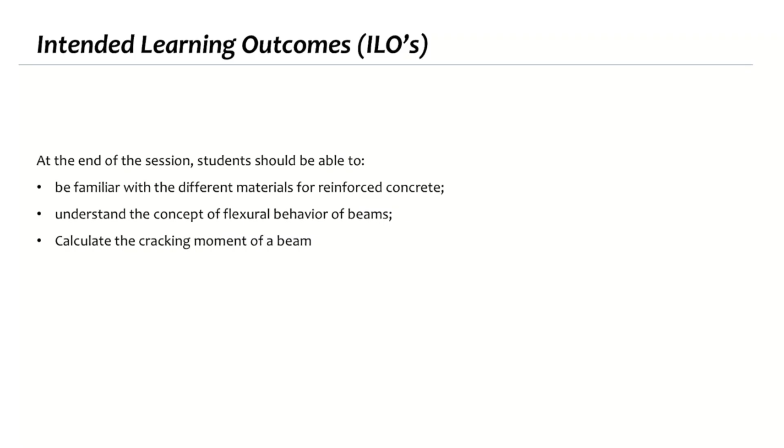So this will be our intended learning outcomes for today.

So first of all, let's talk about the advantage of reinforced concrete. As I've said, basically the most common material in construction is reinforced concrete. We always use reinforced concrete because of the numerous advantages it presents. Marami pong advantages ang reinforced concrete. One of the advantages is it has high compressive strength per unit cost. So ano po yung high compressive strength per unit cost? Concrete is very good in compression, no? Alam po natin 'yan.

Concrete is very good in compression, and since it has a very high compressive capacity, at the same time it is very economical.

Mura po, ano? In comparison with steel, structural steel, for example I-beam, structural hollow section - if you're done with steel, naintindihan niyo po yung I-beam, no? Basically meron po tayong I-beam sa steel. These materials are also very good in compressive strength. However, they have high cost. Mas mahal po yung bakal kaysa sa concrete. So basically, concrete has high compressive strength with economical cost, no?

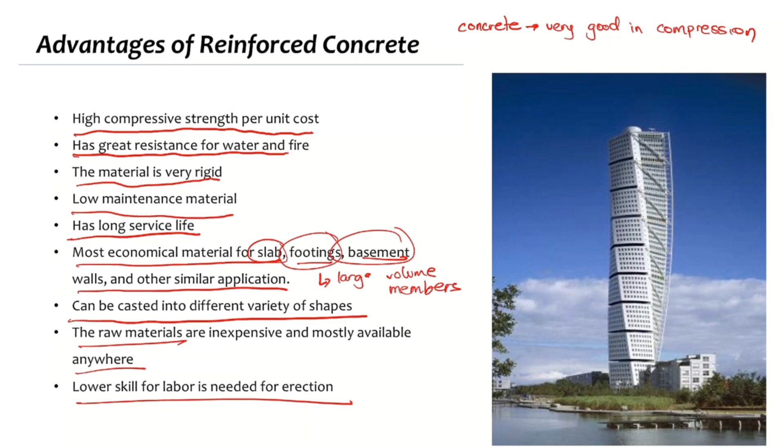Lastly, lower skill for labor is needed for erection. This is true because the most common job for a construction worker is basically pouring of concrete, so you don't need skilled labor to do concrete casting. However, for some other cases, for example steel structures, sometimes you do need skilled labor, especially for connection purposes, when you need to erect special connections. So those are the advantages of reinforced concrete.

So basically, as I've said, reinforced concrete is composed of concrete and steel. Let's talk about concrete first. Concrete is the combination of sand, gravel, crushed rock, or other aggregates held together in a rock-like mass with a paste of cement and water. Basically, what holds the concrete together is the cement - that's like the paste that holds our concrete together. This is what we call the binder.

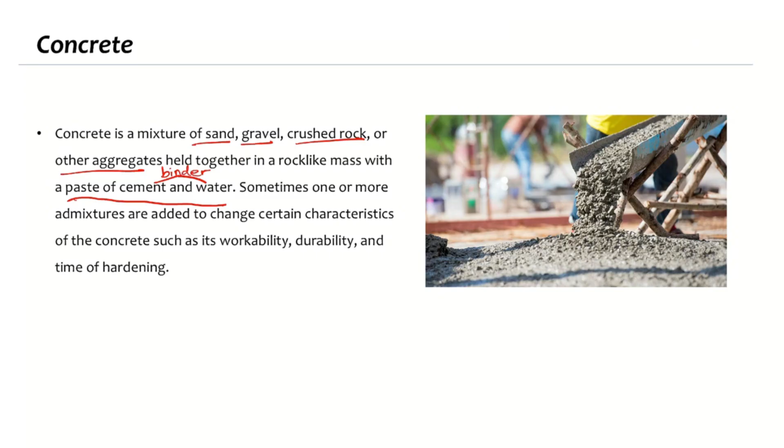Okay, sorry for that, let's continue. So again, talking about concrete - what holds the concrete together is actually the cement plus water. This is actually your binder paste. So basically what forms the concrete: we have cement, and then you add water, plus you add the aggregates, and you will form your concrete. This will form the concrete.

So the aggregates will basically be two types. There are two types of aggregates, which is fine and coarse aggregate. So you have the fine and the coarse aggregate. Basically, what is the fine aggregate that we use in concrete? We have the sand. And for coarse, you have the gravel.

So sometimes one or more admixtures are added for certain characteristics of the concrete, such as workability, durability, and time of hardening. In most projects, especially big projects, adding admixtures is very common, especially if your concrete is coming from a batching plant with a long travel time. Sometimes they add super plasticizer to increase the workability, to increase the strength.

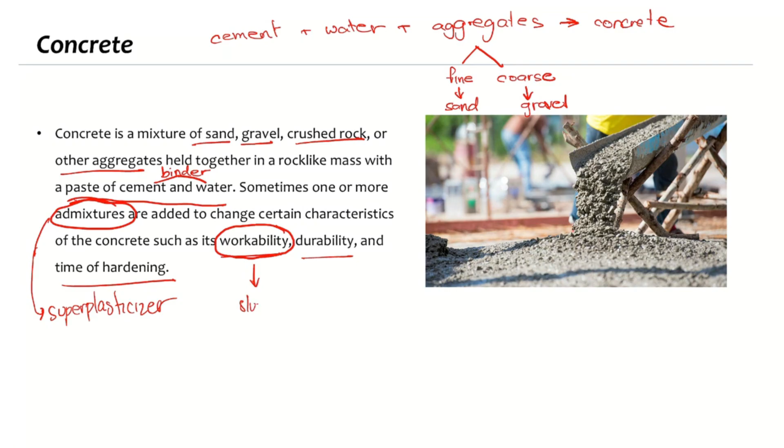So anyway, as I've said, the concrete is actually composed of cement, the aggregates, the water, and the admixture. We need to determine the composition of this concrete - how much cement, how many aggregates, how much water, how much admixture.

So this is where our concrete mix design comes in. The very common concrete mix design that is being used is 1:2:4. What does the first number pertain to? That is cement. The second number is sand, and lastly we have the gravel. So cement, sand, and gravel.

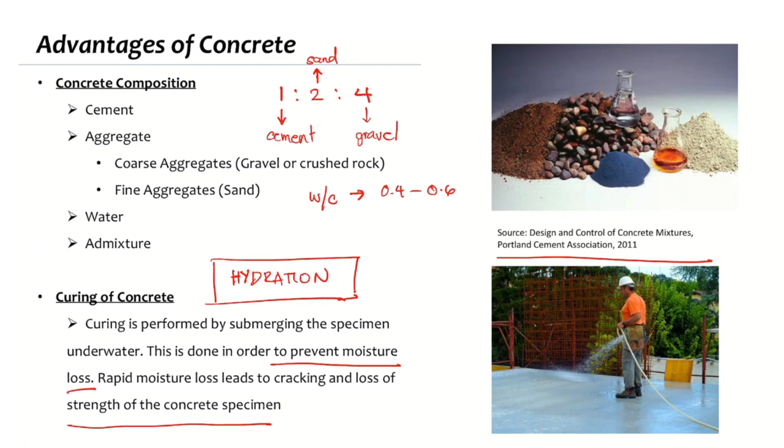So once you cast your concrete, you need to test its strength. The testing of concrete to determine the strength of the casted concrete is in accordance with ASTM C39 - the standard method for compressive strength of cylindrical concrete specimens. You get a sample of the concrete you cast and create a concrete cylinder with a height of 300 mm and a diameter of 150 mm. After curing, you go to the laboratory to test your concrete by putting it in a machine.

What do we call this machine? That machine is used to test concrete, steel, and other specimens. What do we call that machine? Is it familiar?

We have the UTM, that is correct. This is the Universal Testing Machine.

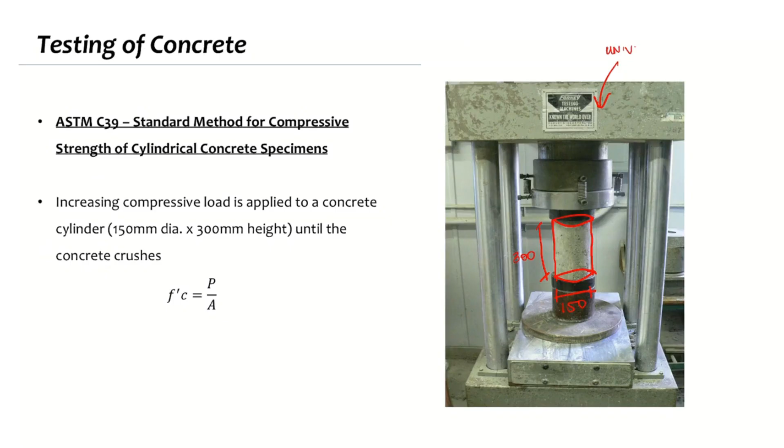This is our UTM. So, once you've created your sample that is 150mm diameter with 300mm height, you go to the laboratory, put it in the universal testing machine, and apply load. The machine will apply an increasing load until the concrete breaks.

So maybe you watched a video during your ConMat class when you took construction materials, showing how to test a concrete cylinder. Basically, when we test a concrete cylinder, once it reaches its maximum strength, it suddenly explodes.

Do you remember that? The concrete suddenly explodes when it reaches its maximum load. When the concrete cracks, it suddenly bursts, like a boom. So why do you think that happens? Why does the concrete suddenly break when it reaches its maximum strength? Why does it suddenly fail?

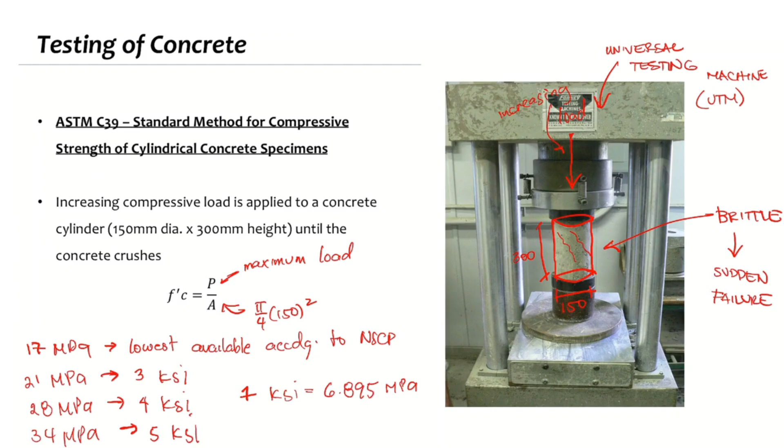Let's recall what we learned in construction materials, or in mechanics of materials. If you plot stress and strain at the beginning of loading, the increase is actually linear - we have a linear increase in stress versus strain. After you reach the proportionality limit, it diverts into a nonlinear curve.

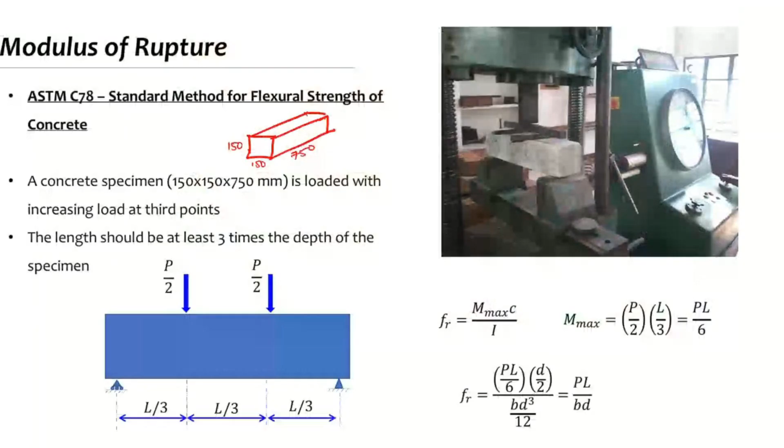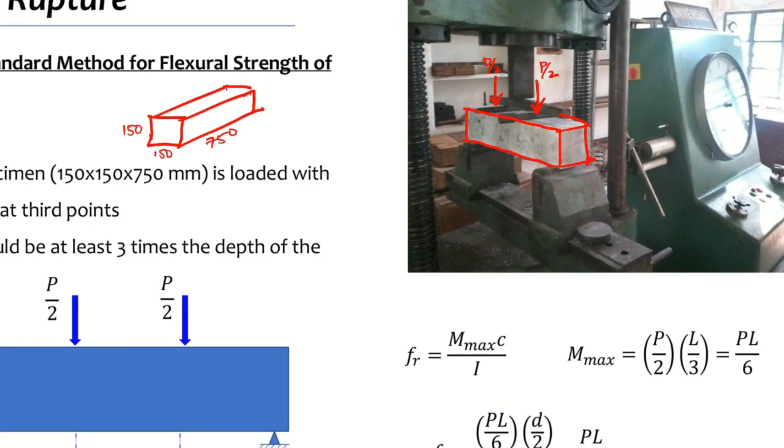This will be your specimen, and then you will have a 2-point loading. Ibig sabihin ng 2-point loading, meron tayong dalawang point kung saan matatransfer yung load. So we have P over 2 and P over 2. And then we will apply the load until the concrete cracks in tension. Mag-a-apply tayo ng load dyan, increase natin yung load until mag-crack si concrete specimen.

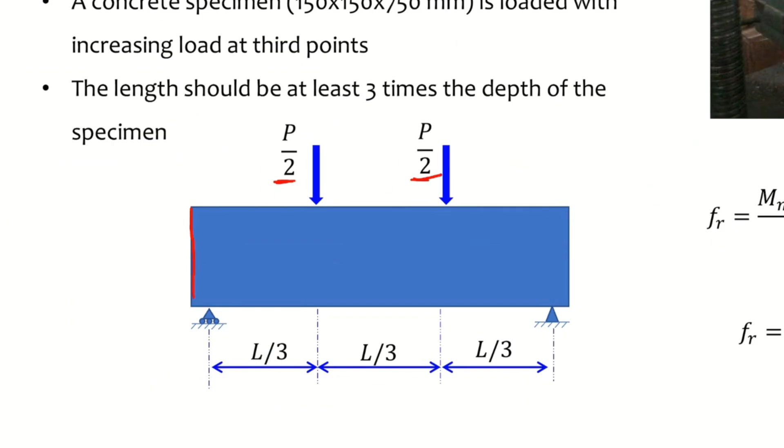So basically, if we're going to idealize, this will be our concrete specimen. We have P over 2 on the left side and P over 2 on the right side, meron kang dalawang P over 2 located at L over 3. So basically, if you want to calculate the shear diagram, you have a reaction dito, P over 2, reaction mo ulit P over 2. So you have P over 2, P over 2, P over 2.

So this will be your shear diagram. This is your shear diagram. That is your shear diagram.

And then if we want to calculate the moment diagram, you just take the area of the shear diagram. Kuhanin lang natin yung area. This is L over 3, this is also L over 3, L over 3. So calculating the area of the shear diagram, you have basically P over 2 multiplied by L over 3. So this is your maximum moment. The maximum moment, according to our shear and moment diagram, the maximum moment is PL over 6.

So in order to calculate the stress, we need to use the simple formula MC over I. Alam natin that if this is simply supported, the top part is actually in compression and the bottom part is actually in tension. Naka-compression yan, ang bottom part is in tension.

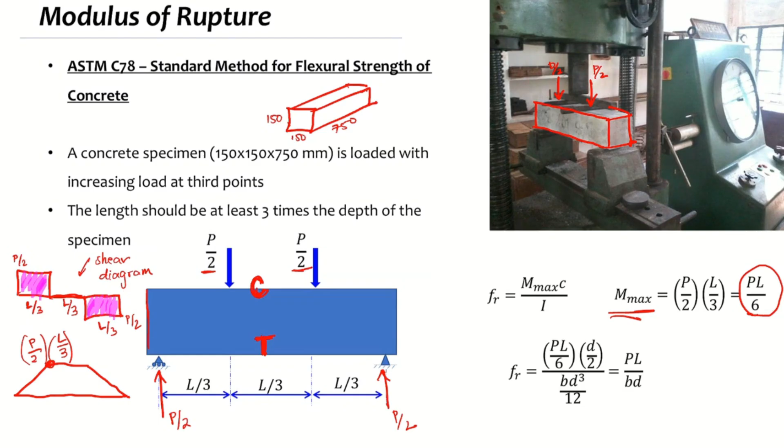So if we want to calculate for the tension stress, kung kailan magka-crack yung concrete, we need to calculate for the tensile stress. Tensile stress is equal to moment MC over I. I don't know if you still remember this simple formula, but basically this is from mechanics of materials. M is the moment, C is the distance from neutral axis to the extreme tension fiber, I is the moment of inertia.

So if you want to calculate for the tension stress, kung kailan magka-crack yung concrete, the moment is PL over 6 as defined, the maximum moment is PL over 6. The distance from the neutral axis to the extreme tension fiber is basically kalahati ng ating kalahati ng depth, so that will be D over 2, divided by the moment of inertia. The moment of inertia is BH cube over 12, for a rectangular beam. So the moment of inertia is BH cube over 12.

So if we are going to simplify the maximum tensile stress based on the result of a standard method for flexural strength of concrete using the value P, recorded is PL over BD. So that is how we determine the maximum tension stress or the modulus of rupture. Yan po yung modulus of rupture natin.

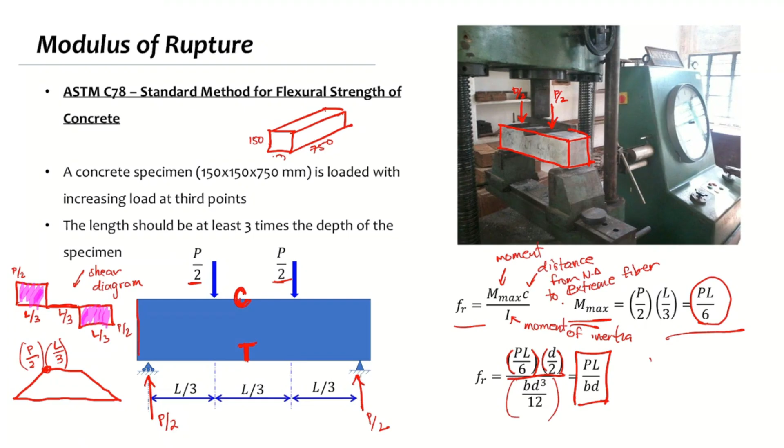Tensile strength kung kailan magka-crack si concrete. So, kailangan nyo bubuin, no? The modulus of rupture is basically the tensile strength where the concrete cracks in tension, the tensile stress when the concrete cracks in tension.

Okay? So, a simple question is why do we need to provide steel in concrete? Bakit ba natin kailangan mag-provide ng steel?

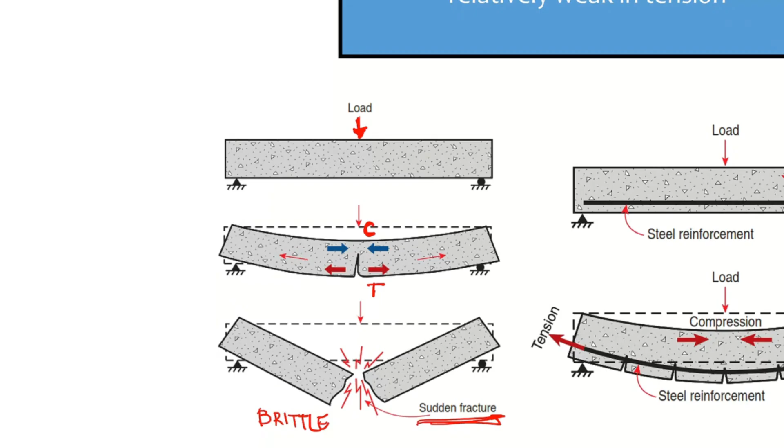However, the solution is to add steel reinforcement. When we add steel, if you add a load at the center, the steel reinforcement can actually resist the tension. So you have compression at the top and tension at the bottom.

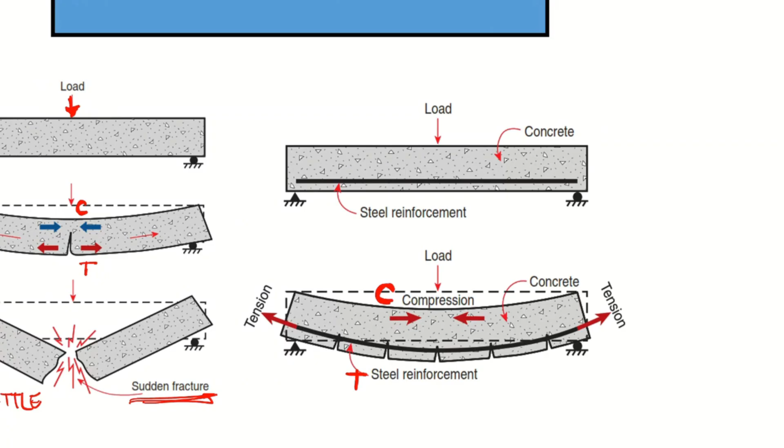However, even though the concrete is weak in tension, the tension will be carried by the steel reinforcement.

And it is an amazing transformation. Why? Because when you add steel reinforcement, the brittle concrete material becomes a ductile material. It is an amazing transformation because the brittle concrete becomes ductile.

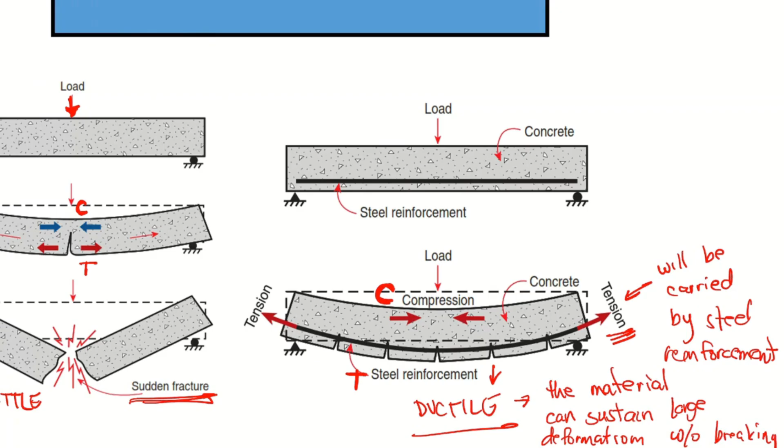What does ductile mean? Ductile is when the material can sustain large deformation without breaking. It means the material can sustain large deformation without breaking, so it is not immediately destroyed when it is ductile. So again, adding the steel reinforcement makes our concrete a ductile material.

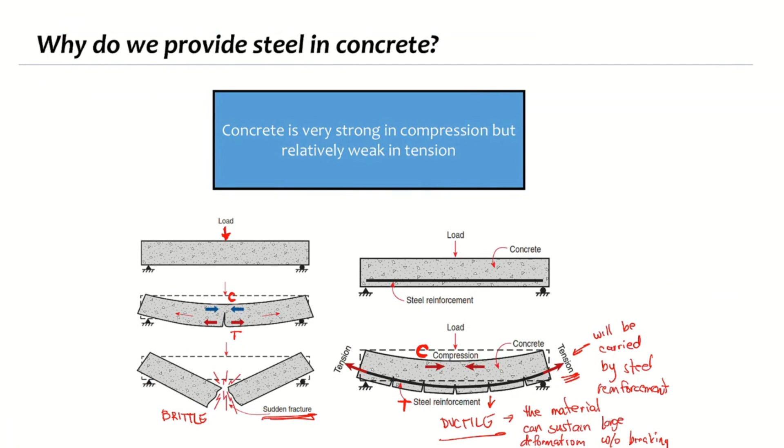So why do we need to use reinforcement in concrete construction? Basically, the first and a very important use of steel reinforcement is to resist the tensile forces, because our concrete is weak in tension. So we need steel to resist tension.

Also, we provide steel reinforcement in order to resist a portion of compression loading. Steel is not only good in tension. The beauty of steel is that it is good in tension as well as compression.

So if you're going to provide reinforcement in columns, let's say for example you have this column, if we provide reinforcement in the column and apply an axial load, the reinforcement also resists the compression loading. So that is the second use of reinforcement, to resist a portion of compression loading.

Next one is to resist diagonal tension and shear. What is diagonal tension? Diagonal tension is actually shear failure.

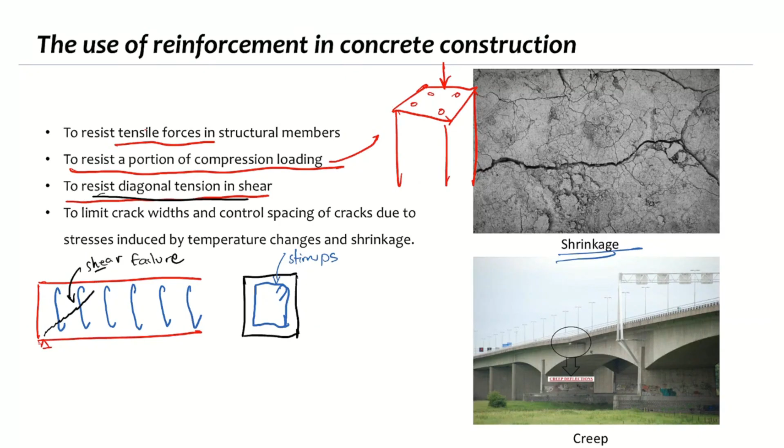Lastly, the last use of reinforcement is to limit crack widths and control spacing of cracks due to stress induced by temperature changes and shrinkage. So we have shrinkage cracking. What does shrinkage cracking mean? Whenever a material, especially concrete material, is exposed to sudden changes in volume, it can actually cause cracking.

Sir, bakit po magkakaroon ng change in volume yung ating concrete? Kapag mainit po, nag-expand yung concrete, lumalaki. So whenever there's heat, kapag sobrang init, there will be expansion, lalaki yung ating concrete. Whenever there's a very low temperature, kapag naman malamig, instead of expand, it will contract. Kapag po malamig, nagko-contract. Kapag mainit, nag-expand. So there's always a changes in temperature.

So okay, side note lang po tayo para ma-appreciate nyo yung changes in temperature. Napapansin nyo po sa mga bridges, may parang awang sa slab. Ano po yung tawag doon? Pag napapansin nyo po, kapag nagda-drive kayo sa bridges, parang may bakal sa gitna, parang may awang sa mga pier. Ang tawag po doon is actually expansion joint. Expansion joint in bridges. Pakita ko lang po para ma-appreciate nyo yung dinidiscuss natin.

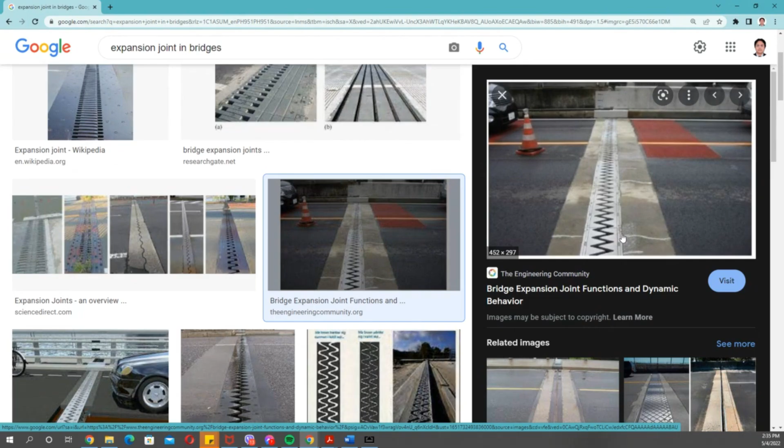So as you can see, in bridges po, nagpo-provide tayo ng parang bakal na ganito po. If you've been to any bridges, meron tayong tinatawag na expansion joint. That expansion joint is actually for temperature changes. Kasi kapag sobrang init, dahil sobrang laki ng concrete volume mo, pwede magbago yung ating concrete, gumagalaw. Kaya po tayo nagpo-provide ng expansion joint. That is for the movement of the deck, movement of the deck of concrete. Kapag sobrang init, lalaki, mag-expand. Kapag sobrang lamig, mag-contract. Okay? That is for the movement.

So basically, sudden changes in volume can actually cause cracking. Kaya po, to limit the crack widths due to cracking, due to any temperature changes, we provide additional reinforcement. Yung additional reinforcement po na yun is just minimum reinforcement. So basically, to avoid cracking, provide minimum reinforcement. And that minimum reinforcement is also called temperature bars. Ito po yung temp bars. Nagpo-provide po tayo ng temp bars para kahit gumalaw yung concrete mo, hindi siya magka-crack. Make sense?

Okay. Another thing, this is also to answer yung one-way slab distribution po natin. Last time we talked about the one-way slab and we mentioned na kapag one-way slab yung slab natin, we only provide reinforcement in one direction. However, as I've said, kahit po one-way slab yan, maglalagay ka pa rin ng reinforcement on the other direction. That is minimum reinforcement for temperature changes. Yun yung tinatawag po natin na temp bars. So again, kapag po one-way slab, even though we only provide the reinforcement in one direction, we provide reinforcement on the other direction for minimum requirements. And that minimum requirement is for temperature bars. That is for the movement. When there is, if that's too hot, gagalaw po siya. It's too cold, gagalaw din naman siya.

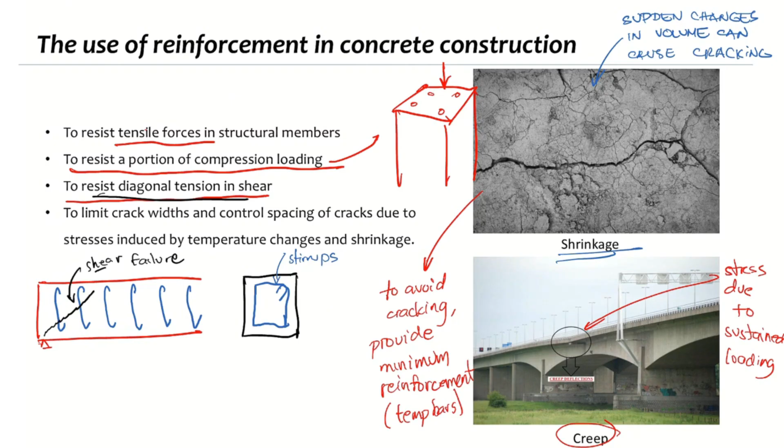So the strength of your longitudinal bars also varies depending on your requirement, depending on usage. For example, if you are going to use it as stirrups, maybe you just need 275 megapascal. It depends on where you will use it.

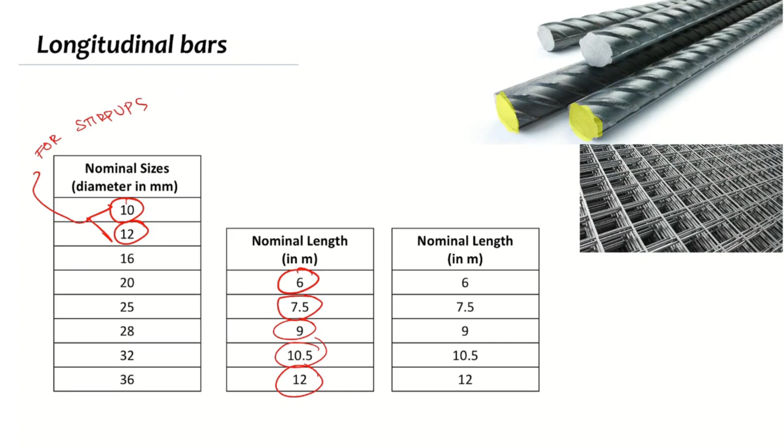The strength, usually in a construction site, when you go there, is actually color-coded. So what they do is they color the bars. The strength is dependent on the color that was used, the color coding.

We have different strengths as per ASTM: 33 KSI, 40 KSI, and 60 KSI. For Philippine National Standard, PNS, we have 230 megapascal, 275 megapascal, and also 415 megapascal. And for NSCP, we have 230 megapascal, 280 megapascal, and 420 megapascal.

For the color coding: for 230 megapascal we use white, for 280 megapascal we use yellow, and lastly for 420 we have green. So white, yellow, and green. Again, when you go to a construction site, the strength is color-coded.

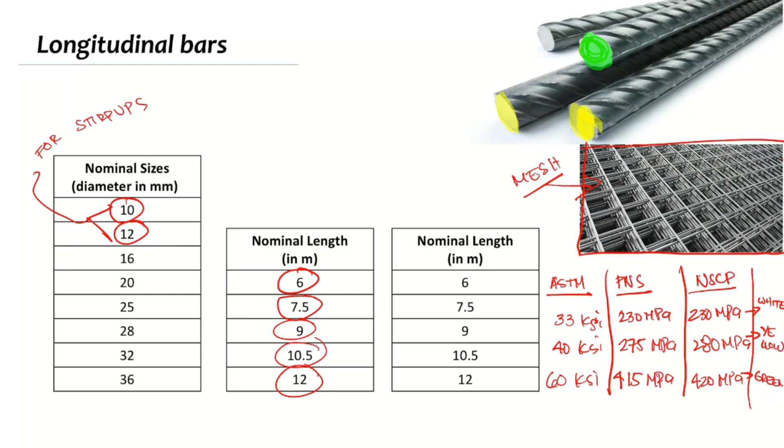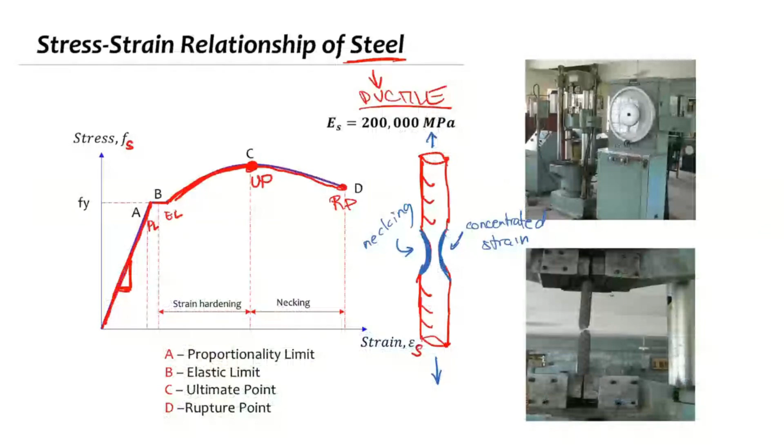As we say, mahina po yung concrete in terms of tension. So concrete is relatively weak in terms of tension. That is why, kung nasaan yung tension, dun siya magka-crack.

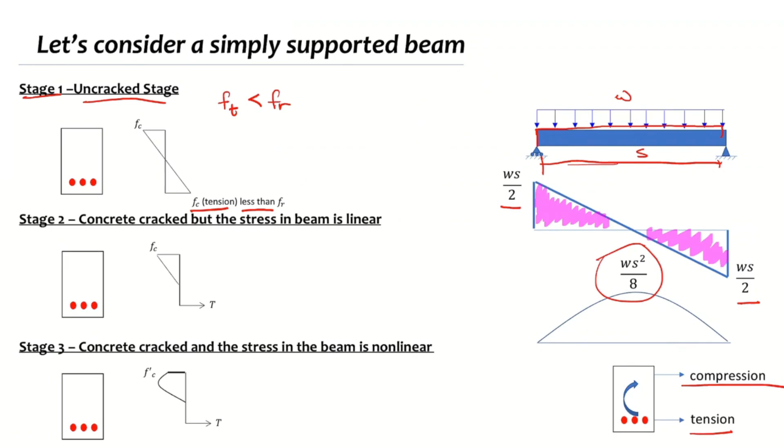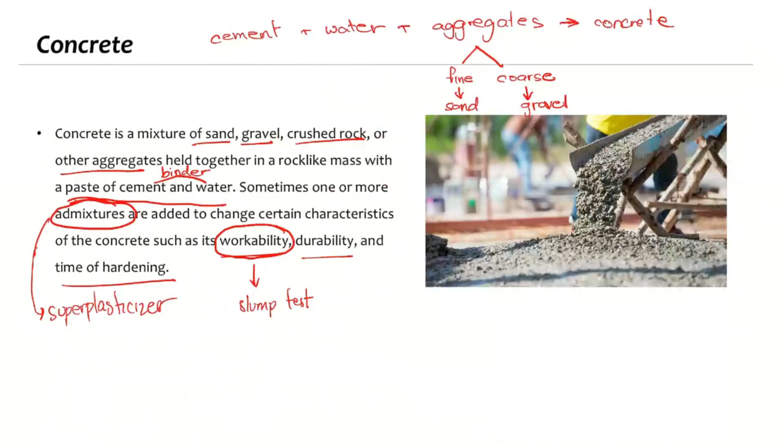So the answer is modulus of rupture. That is correct. So we have the modulus of rupture, ito po yung pinag-usapan natin kanina. According to NSCP, the modulus of rupture is 0.62 lambda square root of Fc prime. So yun po yung modulus of rupture, yung FR.

So if the tension stress is less than the modulus of rupture, then your concrete is actually uncracked. So if the concrete is uncracked, you can neglect the reinforcement in stress calculation. Again, if uncracked po yung beam natin, it means that Ft is less than the modulus of rupture, you can neglect the reinforcement in stress calculation.

Stage 2 is when the concrete is cracked but the stress in the beam is still linear. So stage 2, kailan po magka-crack si concrete? Kapag si tension stress is greater than Fr, then concrete is cracked. Again, if Ft is greater than Fr, then the concrete is cracked. Then that means below the neutral axis, yung magka-crack na concrete, this will now be ineffective.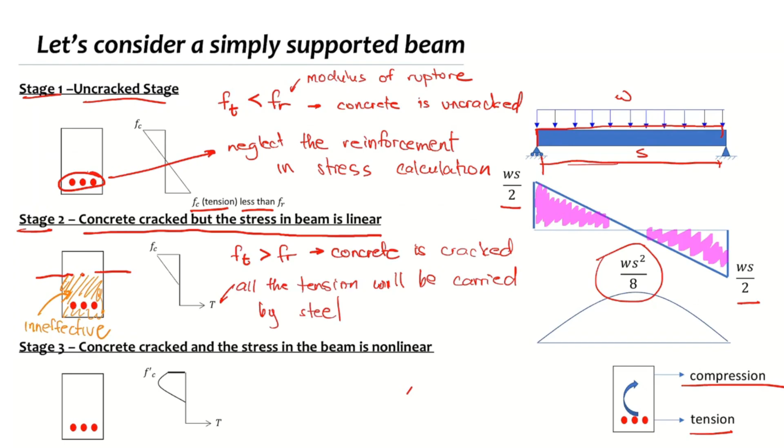Ineffective na po yung nag-crack na concrete, not yung beam. The concrete will now be disregarded in the stress calculation, and all the tension will be carried by the steel reinforcement. So all the tension will now be carried by the steel. However, the stress in concrete is still linear. As you can see, we have the stress in concrete and the stress is still linear.

Ano na nga po yung design methodology if the stress is linear? What is the design methodology? We have WSD. So for stage 2, we are going to use working stress design. Gagamitin po natin yung stage 2 sa working stress design. Stage 3 is when the concrete is cracked and the stress in the beam is nonlinear. So again, concrete is cracked, so all tension is carried by the reinforcement.

So all the tension is carried by steel. However, for this stage 3, the stress distribution is now nonlinear. So if you have a nonlinear stress distribution, that means this will be ultimate strength design. So stage 2 will be WSD, stage 3 will be USD.

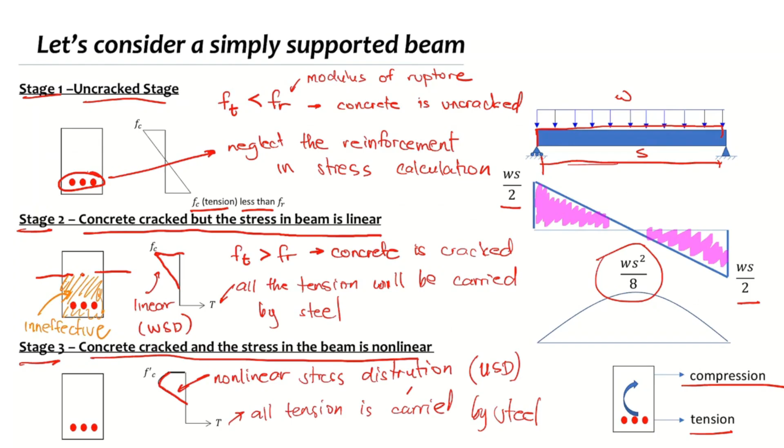So now let's talk about the stages of beam failure.

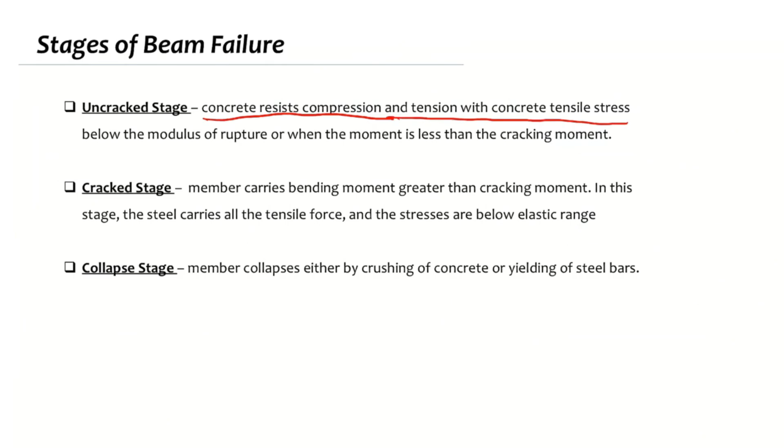We have the uncrack stage, basically when the concrete resists compression and tension with concrete tensile stress below the modulus of rupture. So again, the tension is less than the modulus of rupture, when the moment is less than the cracking moment. So the cracking moment is actually your MCR. The cracking moment is the moment required in order to crack your concrete. That is called MCR.

Next stage is actually called the crack stage. Member carries the bending moment greater than the cracking moment. So kapag yung moment na kine-carry ng member is greater than the cracking moment, magka-crack yung beam. In this stage, the steel carries all the tensile force and the stresses are below the elastic range. And the last stage will be the collapse stage. However, elastic lang po ito, so this will be linear.

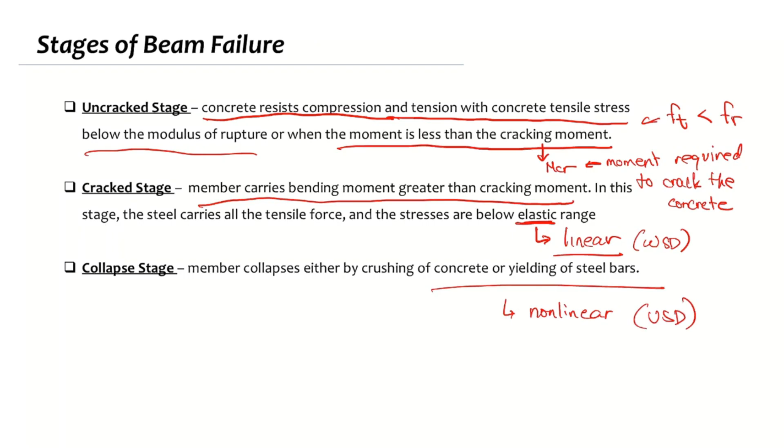And then lastly, the collapse stage. Again, for ultimate strength design, we are going to consider that the beam is actually on the verge of collapsing. Malapit na pong mag-collapse. Member collapses either by crushing of concrete or yielding of steel bars. So that means we have nonlinear, and this will be for USD. That is for ultimate strength design.

Okay, the cracking moment is the moment where the concrete crushes in tension and becomes ineffective. So ibig sabihin po kapag na-reach na nung beam, ang dinadala niya is greater than the cracking moment, then that means the concrete will crush in tension and becomes ineffective. After this stage, the whole tension will be carried by the steel reinforcement. So beyond the cracking moment, the whole tension will now be carried by the steel reinforcement. Ang magdadala na po is the steel reinforcement.

So how do we calculate the cracking moment? The cracking moment is actually given by a simple formula. We know that the modulus of rupture is just the stress. Stress is given as the moment, MCR, multiplied by the distance to the neutral axis, MCR*YT over IG. So MC over I lang po. And MCR will be the cracking moment. This is actually your cracking moment.

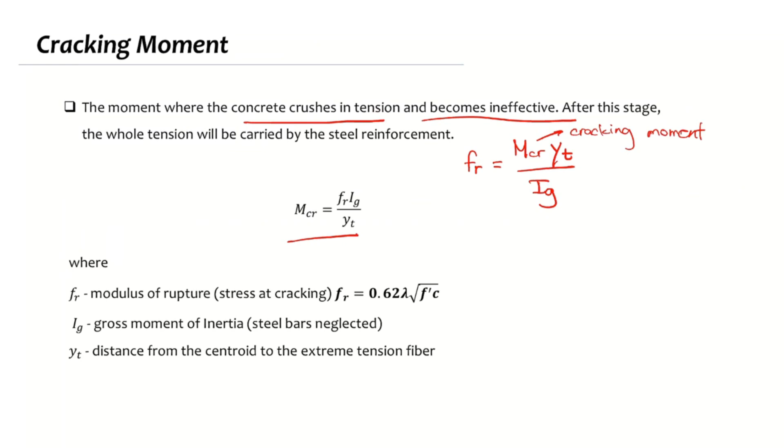So if we want to solve for cracking moment, just rearrange the variables. We have the cracking moment is equal to FR multiplied by IG divided by YT. Where FR is the modulus of rupture, which is 0.62 lambda square root of Fc prime. IG is the gross moment of inertia. For IG, we are going to neglect the steel bars, so basically concrete only. And YT is the distance from the centroid to the extreme tension fiber.

So basically, if you have this beam, ito po yung beam natin. For example, this will be the base width and this is the depth. So if this is the centroid, then this will be YT. That is YT. YT is the distance from the centroid to the extreme tension fiber.

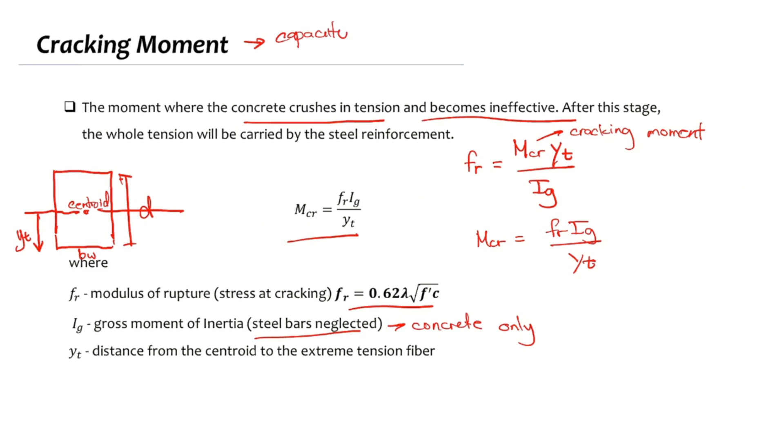So we can also define cracking moment. Cracking moment is basically the capacity of the beam. This is the capacity of your beam before the concrete crashes in tension. So again, cracking moment is the capacity of your beam before the concrete, not crashes, cracks. Not crashes, cracks po, ano? Before the concrete cracks in tension.

So the modulus of rupture is given as 0.62 lambda square root of Fc prime. But in English units, you can also use this one. In English units, this is in terms of PSI. FR will be equal to 7.5 lambda square root of Fc prime, where Fc prime should be in PSI. Dapat po yung Fc prime nyo in terms of PSI.

Are we clear with the concept of cracking moment? Basically, kapag na-reach niya po yung cracking moment na yun, magka-crack na si beam.

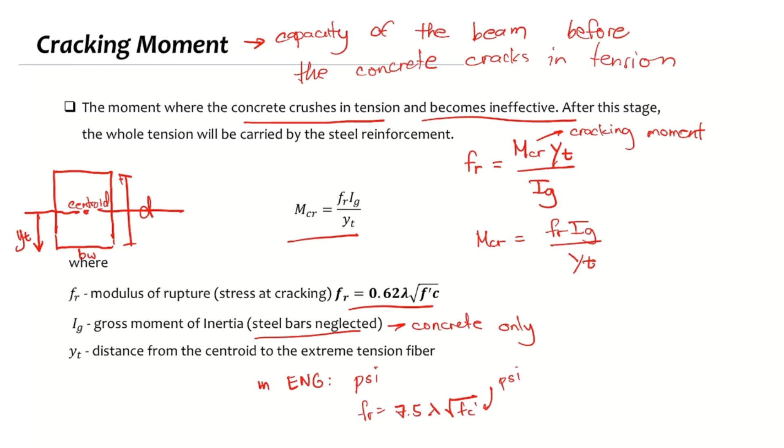Basically, our concrete cracking can be determined by using a simple formula: stress equals moment, MCR, YT, divided by IG. Rearranging the variables, we have MCR equals FR, IG divided by YT, where FR is the modulus of rupture, given by our code as 0.62 lambda square root of Fc prime.

Substituting the values, we have 0.62, lambda is 1, square root of Fc prime, which is 28. How much is the modulus of rupture? This is 3.28 megapascal.

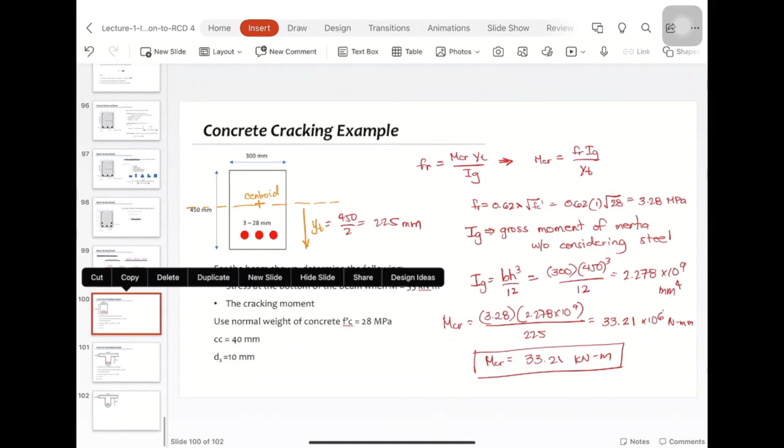So this will be our cracking moment. The next question will be to calculate the stress at the bottom of the beam when the moment is 33 kilonewton.

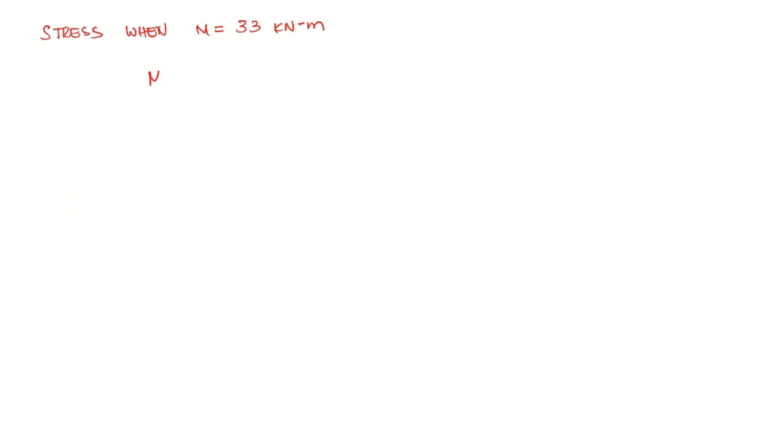Let's write it down: the stress when moment is equal to 33 kilonewton meter. We already know that the moment is actually less than MCR. So if the moment is less than the cracking moment, what can we say about our section? Is it cracked or uncracked?

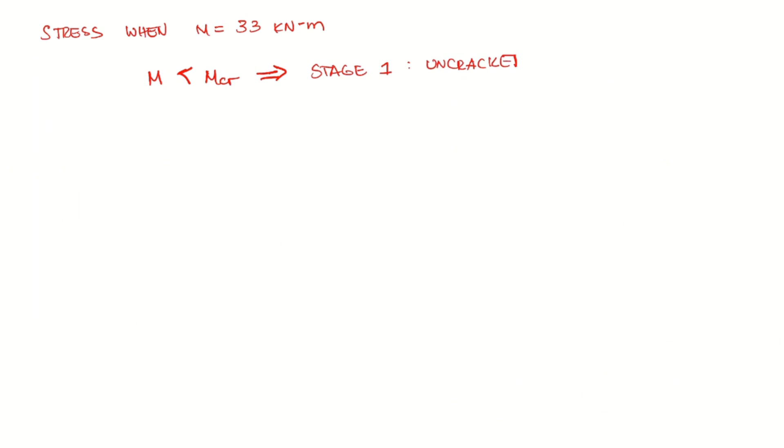Uncracked. This is actually stage 1. So when our section is uncracked, we can neglect the steel reinforcement and use IG in stress calculations, meaning we'll use the gross moment of inertia which we already have.

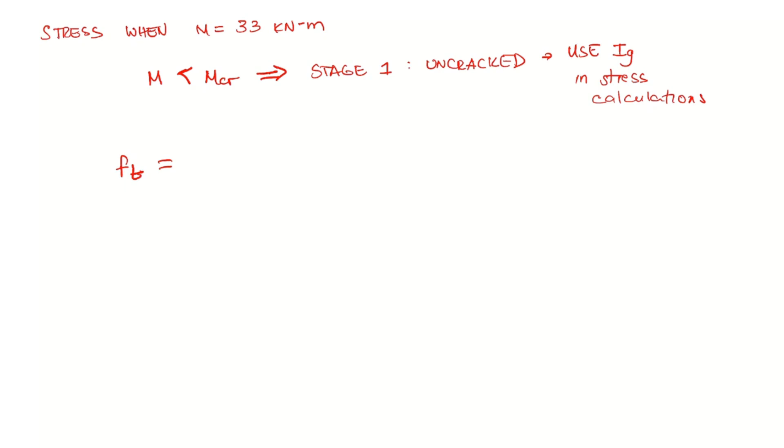So the tension at the bottom, when the moment is 33 kilonewton meter, can be solved as moment MY over I, that is equal to 33 times 10 raised to 6 to make it newton millimeter. YT is 225. IG is 2.278 times 10 raised to 9. So you can now calculate the stress.

What is the stress? This is our stress at the bottom. The answer is 3.26 megapascal.

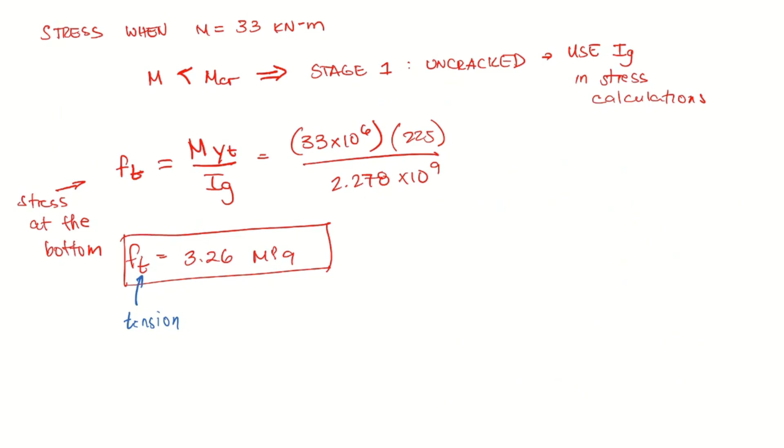Let's try to answer this problem. For this one, this is not a simple rectangular beam, this is a T-beam. So we need to also calculate for the cracking moment, and in order to do that, we need to use Varignon's theorem.

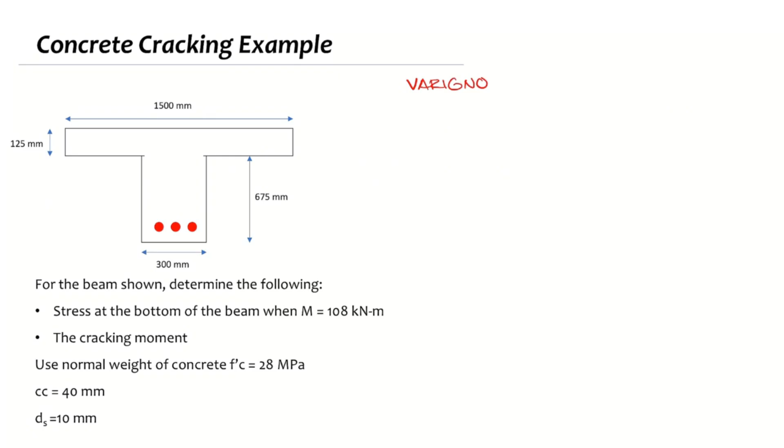So we will use Varignon's theorem. Basically, Varignon's theorem is, if you recall from your statics, the total area multiplied by Y top, or basically Y tension, YT, is equal to area 1 times Y1 plus area 2 times Y2.

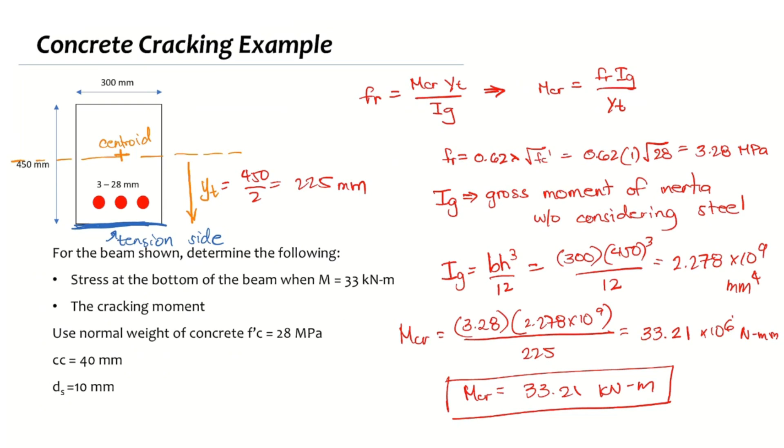So in this case, I will divide my section into two areas. This will be area 1 and this will be area 2. We need to define the centroid. That's why we use Varignon's theorem, to know where the centroid is located, because we need to find the centroid. In the other problem, it was easy to locate the centroid because it was just a rectangle, but for this one, we need to locate the centroid.

This will be your neutral axis, so this is your centroid. We need to determine what its location is, basically the distance. This will be YT. So I will make this my reference line. This will be my reference line. The bottom will be my reference line.

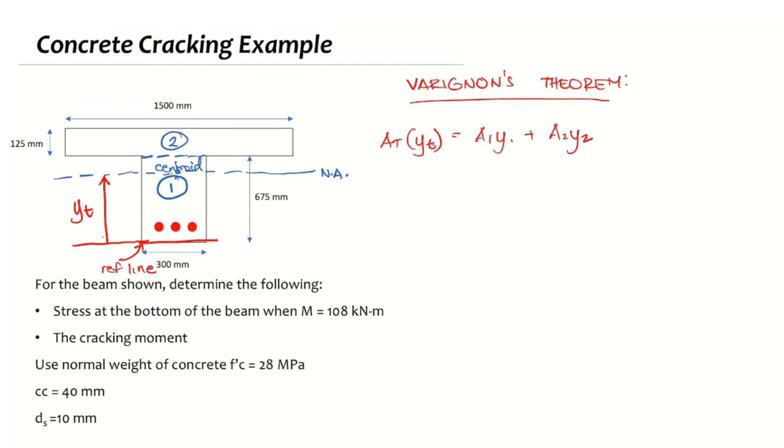So let's use Varignon's theorem. Basically, the moment of area of the section. Moment of area. First, let's define the total area. We have the first section, 675 multiplied by 300, plus the second section, that is 1,500 multiplied by 125, and then multiplied by YT.

That is equal to the first area, area 1. Area 1 is a rectangle, so that will be 675 multiplied by 300, multiplied by the distance from the centroid of area 1 to the reference line. What is the distance from the centroid of area 1 to the reference line? De Guzman, John Gabriel? That's 337.5, or basically 675 over 2.

So this is area 1 and this is Y1. Plus, continuing the moment of area, area 2, that will be 1,500 multiplied by 125. Next one, De Vera, Maria Luisa, what is the distance from the centroid of area 2 from the reference line?

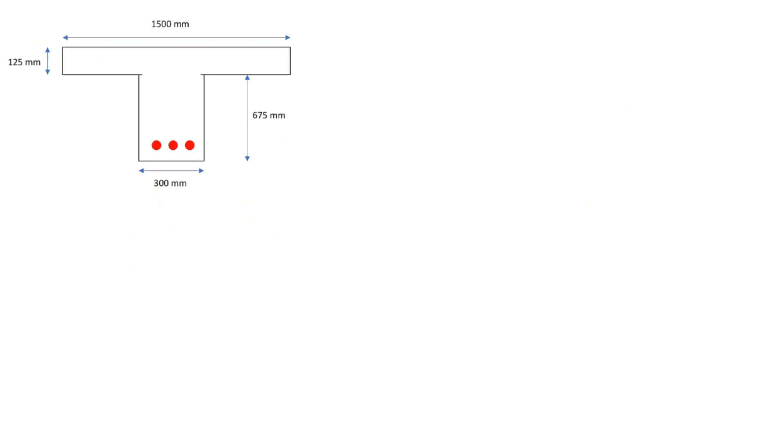So after we determine the location of the centroid, what we need to find next is the gross moment of inertia. So we need to calculate the gross moment of inertia, now that we know the position of the neutral axis. Let's say this is our neutral axis, and the depth of the neutral axis will be 529.81.

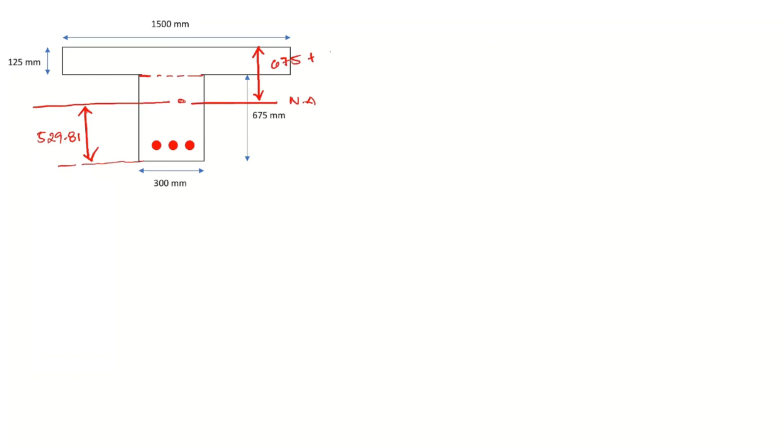And coming from the top, let's say this one. Coming from the top, this will be 675 plus 125 minus 529.81. What's that value? 270.19. So calculating for the moment of inertia.

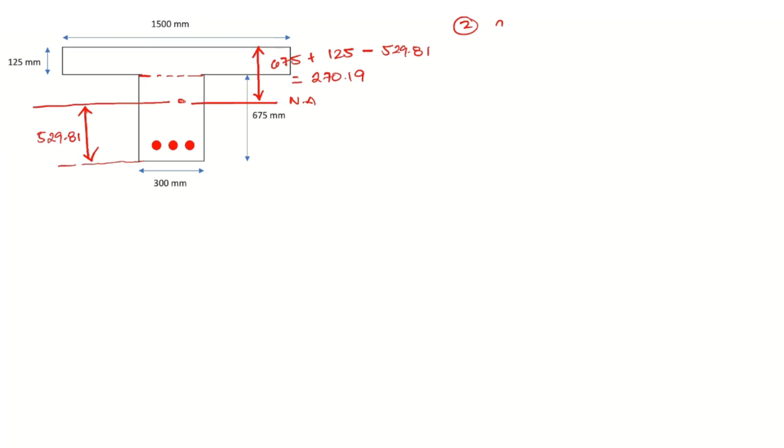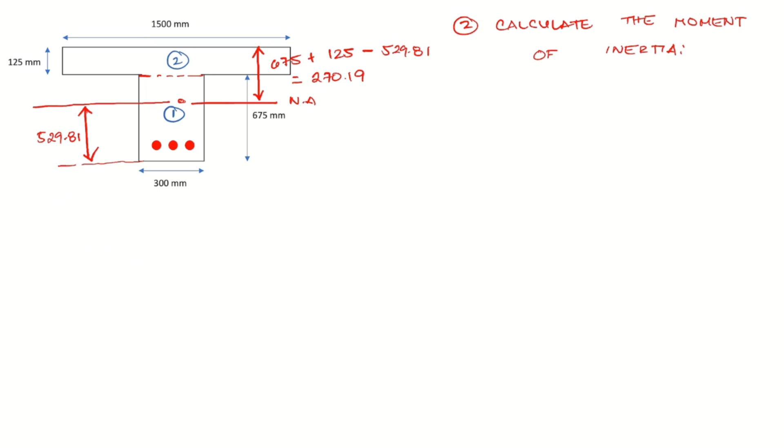So again, we are going to divide the section into area 1 and area 2. And calculating the moment of inertia, we are going to use the parallel axis theorem. So I gross will be equal to I and A. If we are considering area 1, get the moment of inertia from the centroid of area 1, plus the transfer formula, area times d squared. This is actually called the parallel axis theorem.

So I and A plus area d squared. Let's solve for I gross considering area 1 first. Area 1 is just a rectangle, so BH cubed over 12. The base is 300, height is 675, cubed over 12. Plus the transfer formula, transferring to the neutral axis.

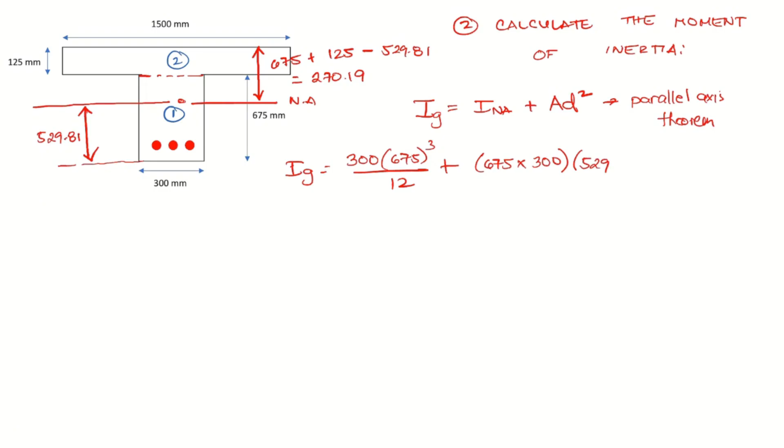So the area is 675 multiplied by 300, multiplied by the distance coming from the centroid of that area to the new centroid, that is 529.81. Let's say, for example, this is the centroid of that area. The centroid of that area is actually 675 over 2, right? So what we're looking for is the distance from the centroid of area 1 to the neutral axis. So basically this is D1. That's D. So to get D1, that is 529.81 minus 675 over 2, squared.

Clear on the transfer formula, parallel axis theorem? This is just a review of statics. Is that clear?

Okay, this is for area 1, all of this is for area 1. Plus area 2, let's add area 2. That will be the base. Base is 1,500.

The height is 125 cubed over 12, plus the area, which is 1,500 multiplied by 125, times the distance.

If this is the centroid of area 2, we need to find this distance, this will be D2. That will be 270.19 minus 125 over 2, squared. This is for area 2.

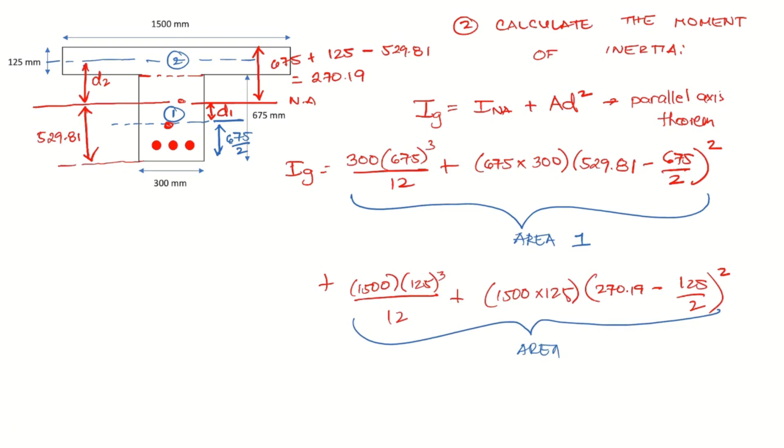Calculating for I gross, the gross moment of inertia, we have 2.35 times 10 raised to 10 millimeter to the fourth. So now we can calculate for the modulus of rupture, FR.

So we have YT, this is our YT. FR is equal to 0.62 lambda square root of FC prime. That is 0.62 lambda is 1, square root of 28. Our modulus of rupture is 3.28 megapascal. Then calculating for MCR, the cracking moment, that is FR times IG over YT.

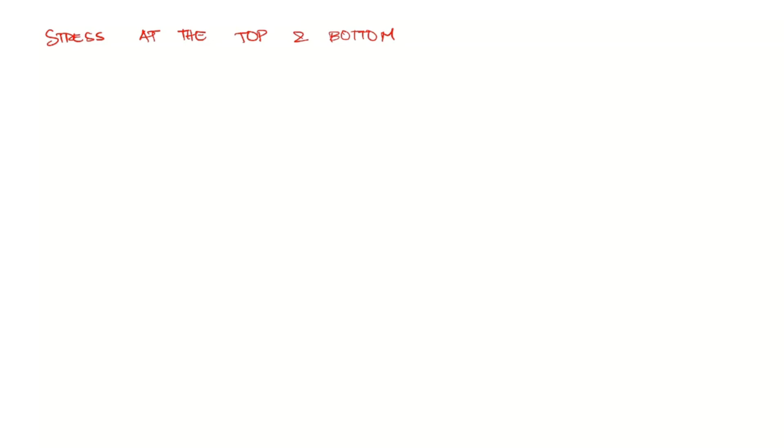So let's calculate the stress at the top and bottom when moment is equal to 108 kilonewton meter. Basically our cracking moment is 145. Our moment that we need to calculate for stress is 108.

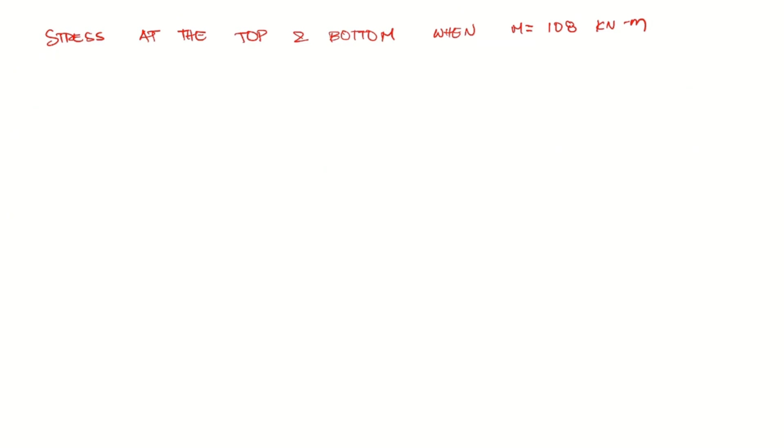Is it crack or uncracked? Crack or uncracked? Did it crack or not? Uncracked. Your cracking moment is 145, your moment is only 108. So again, it's less than. Moment M is less than MCR, so it's uncracked.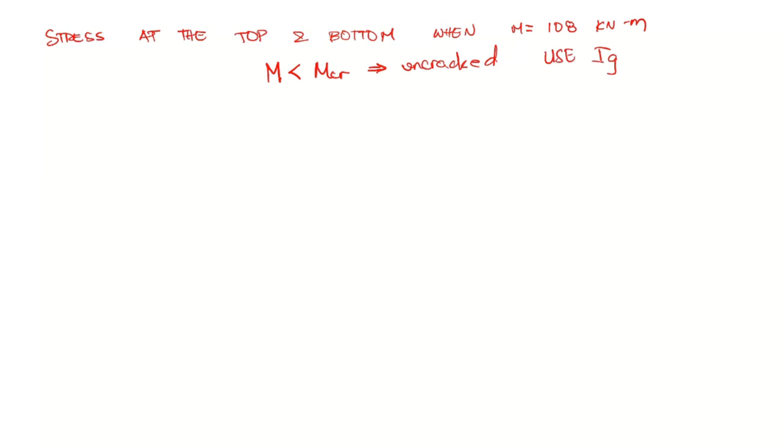So again, use IG, use the gross moment of inertia. So let's calculate the stress at the top. Stress at top, to calculate the stress at the top, that will be the compression stress. So FC is what I'll use. FC is equal to

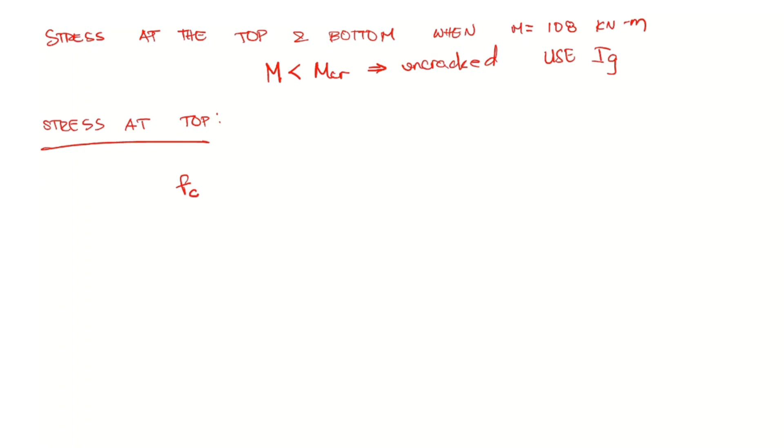basically M times YC divided by IG. So the moment is 108 times 10 raised to 6 to make it kilonewton meter. YC is basically the distance from the neutral axis to the top. What is the distance from the neutral axis to the top fiber?

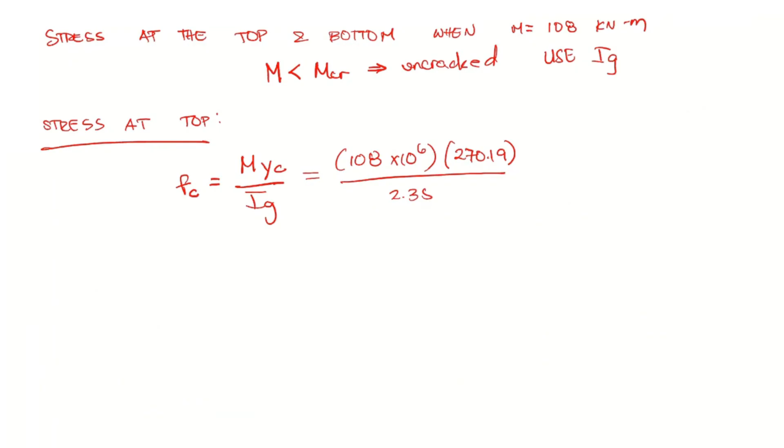270.19. So we have 270.19 divided by the I gross. I gross is 2.35 times 10 raised to 10. So we can now calculate the stress at the top, which is equal to 1.24 megapascal.

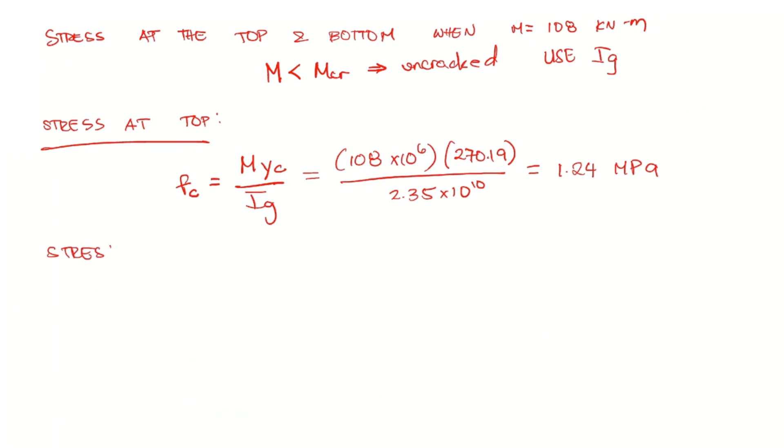We can also calculate the stress at the bottom. Stress at the bottom, which is FT, stress tension, meaning. So we have moment times YT divided by IG. This is 108 times 10 raised to 6, multiplied by YT, which is 529.81, divided by IG, 2.35 times 10 raised to 10. So what is our stress at the bottom? We have 2.43.

So basically, if we're going to draw the stress strain diagram, we have the stress at the top, 1.24 MPa, compression, and the stress at the bottom, which is 2.43, tension. Compression at the top, tension at the bottom. So this is compression stress, and this is tension stress.

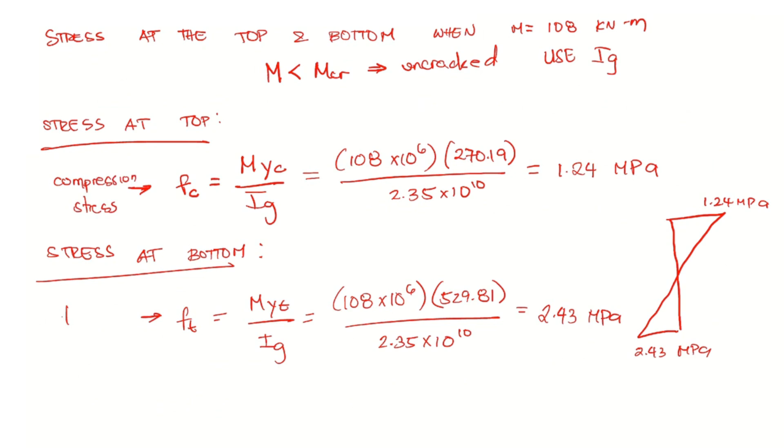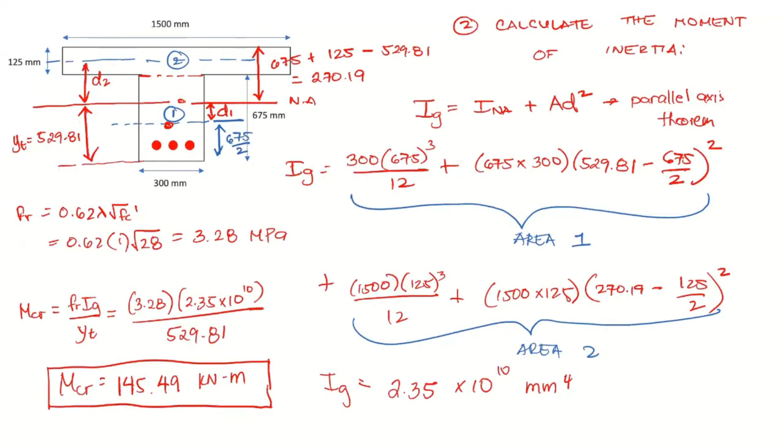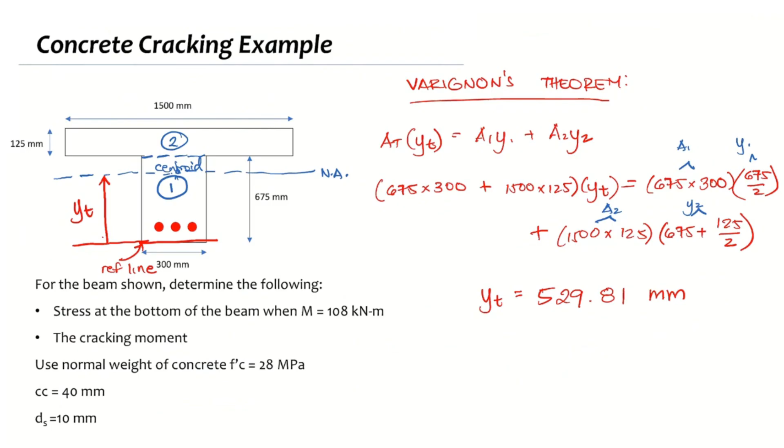Any question about this problem? Any question? Okay, I have a question.

Let's ask someone. So, how about for a cantilever beam? Where is the tension? Where's the tension side? Let's ask Mr. Aaron Ferreira. Mr. Aaron Ferreira, where is the tension side?

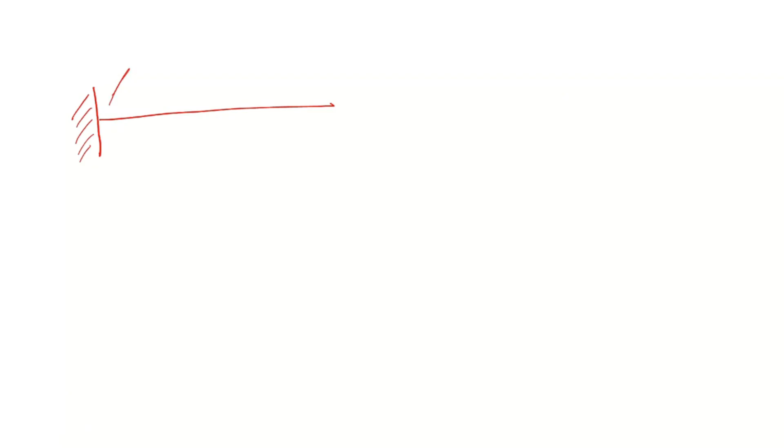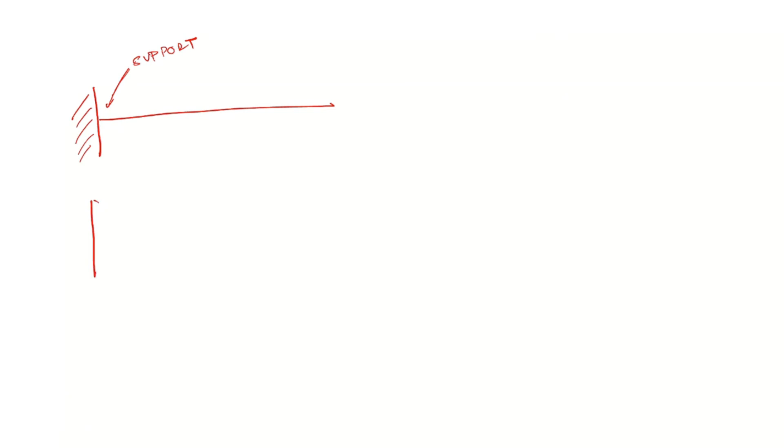For a cantilever beam, consider at the support. Let's say at the support, where is it? Okay, so basically at the support you have tension at the top. So you have tension at the top, tension. And this is compression.

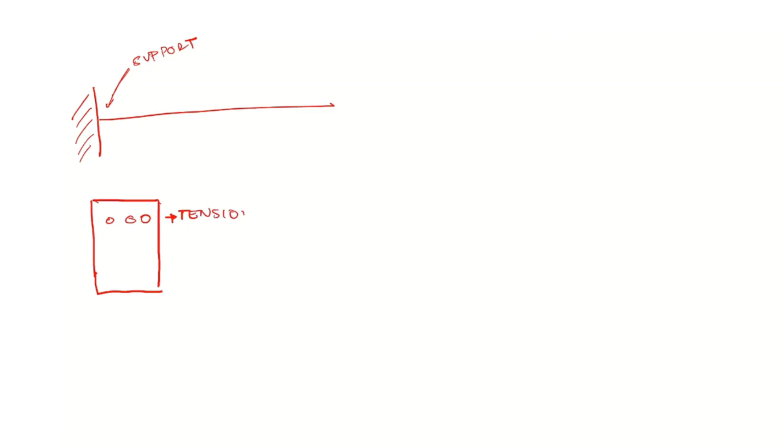So again, if you have tension at the top, this will be your YT. This is our YT. Again, the YT will depend on where the tension is. Wherever the tension is, that's your YT. Because wherever the tension is, that's where the beam will crack. Wherever the tension is, there the beam cracks. Make sense? Are we clear with that?